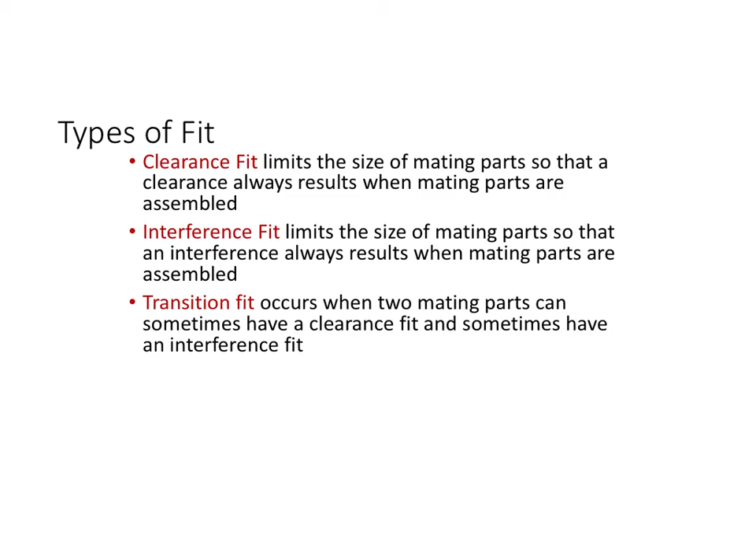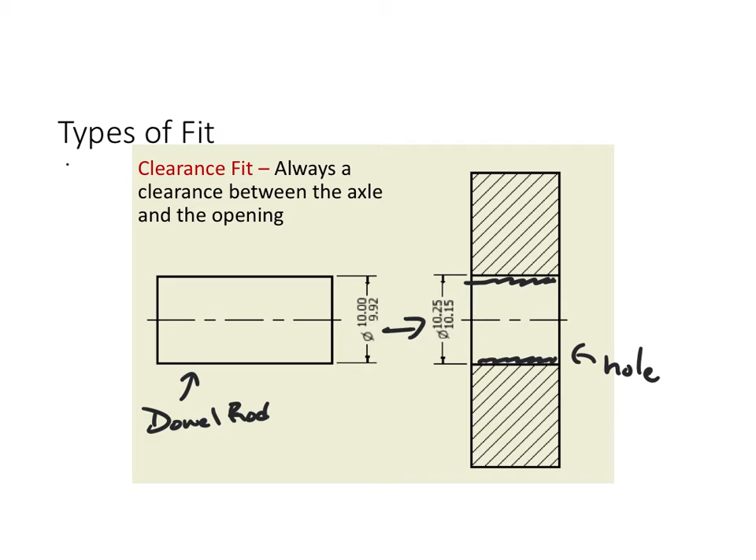So here we go. Let's just pretend that's a dowel rod there. And you got your hole over here. So in this case, we have the dowel rod going into the hole. And when it goes into that hole, no matter what happens, there's always going to be a little bit of wiggle room left in here. There's always going to be a little bit of space when I put that dowel rod in.

And how I can determine this is, let's say we make the dowel rod as big as it'll go. As big as it'll go is 10 inches. Well, the smallest size this hole will go, 10.15, is still not smaller than 10. So even at the smallest the hole is and the largest the peg could be, there's still going to be 0.15 inches of space in between them. So there will always be wiggle room. That is a clearance fit.

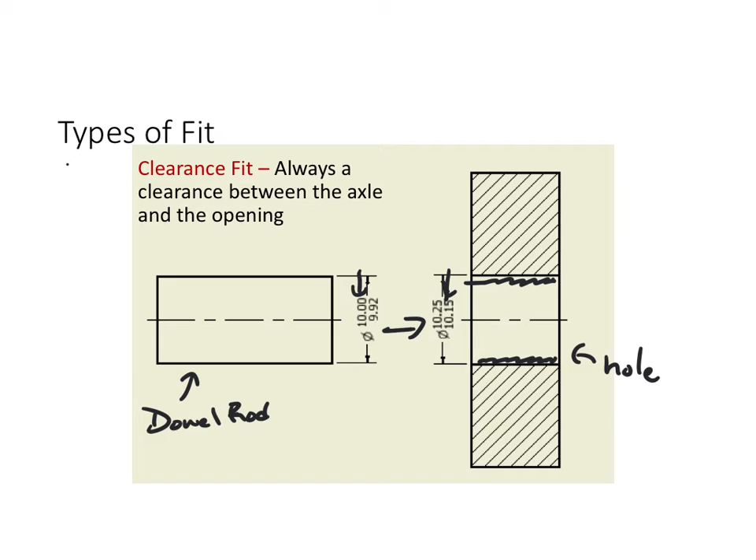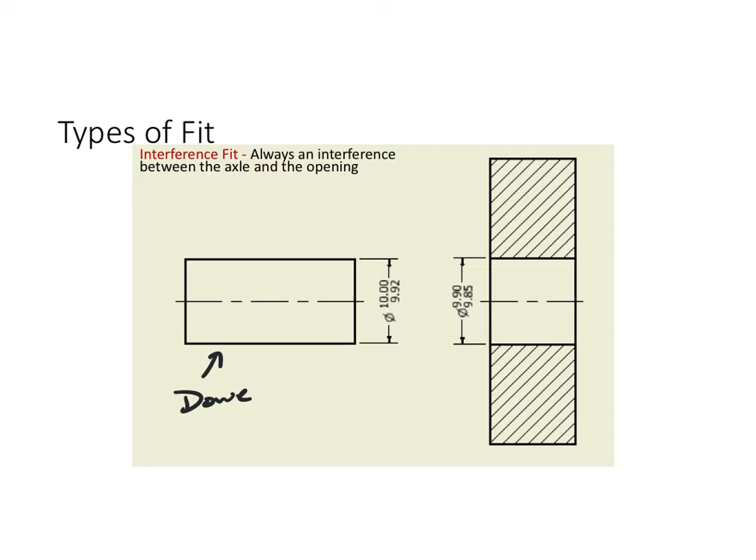Interference fit is obviously the opposite of the clearance fit. When these two go together, they're always going to overlap a little bit. So it's going to take breaking out the mallet and knocking this dowel rod in. So here we have the dowel rod again. That's not how you spell dowel. There we go. And then you have your hole over here. When we put the dowel rod into the hole, it's always going to interfere.

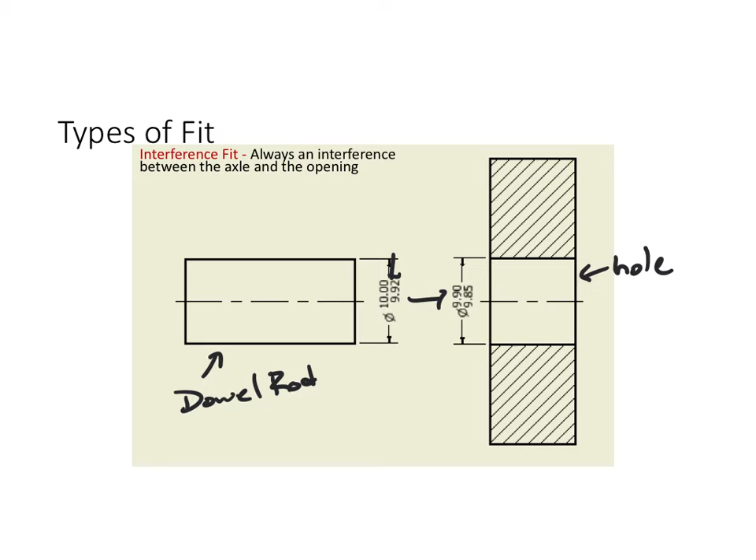Because this time, let's make that dowel rod as small as we can. The smallest size that dowel rod can be is 9.92. Well, let's make that hole as big as we can, so we're trying to make some clearance in between the two. But the biggest I can make that hole is 9.9 inches. So no matter what I do, there's still going to be 0.02 inches of interference in between those two.

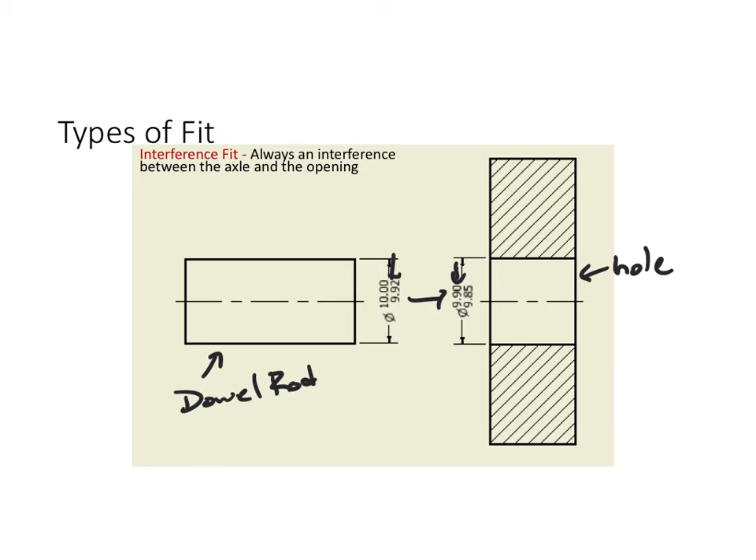So let's look at the last one here, the transition fit. This one can kind of go either way. Let's make the dowel rod as large as it can go, 10.15 inches, and let's make the hole as small as it can go, 10 inches. If the dowel rod is 0.15 bigger than the 10-inch hole, then in this case we would have an interference fit. But let's back that up for a second.

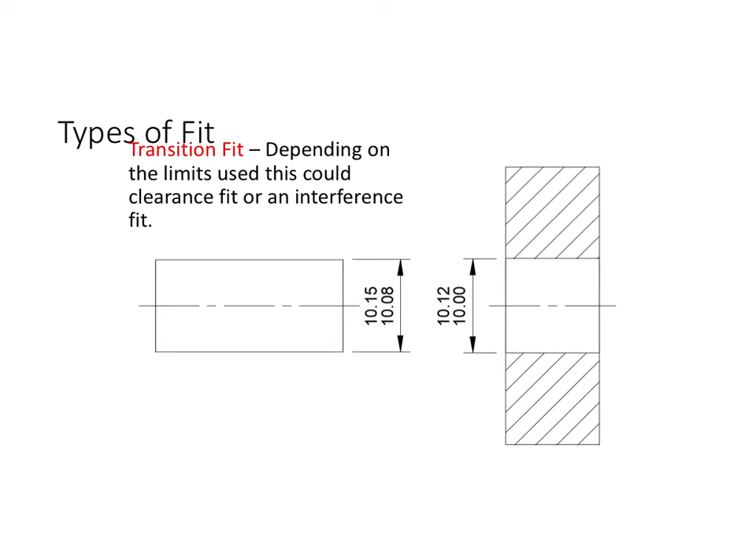Now let's make that dowel rod as small as possible, 10.08, and make the hole as big as possible to see if these overlap still. That's 10.12. Well, that hole is bigger than the smallest dowel rod. So there's a way we can put these two together and still have some wiggle room. So when these fit together, they could have clearance, they could have interference. It depends on where the manufacturer fell within those tolerances. So this is a transition fit. It can go either way.

Now on an internal feature, which is like a hole, the lower limit gives me the maximum material, because if I have a block of wood and I drill a hole into it, the smaller the hole I drill, the more material I leave behind of that block. So if I drill a smaller hole, I leave behind more wood. So the lower limit, the smaller hole, smaller internal feature, gives me the maximum material condition.

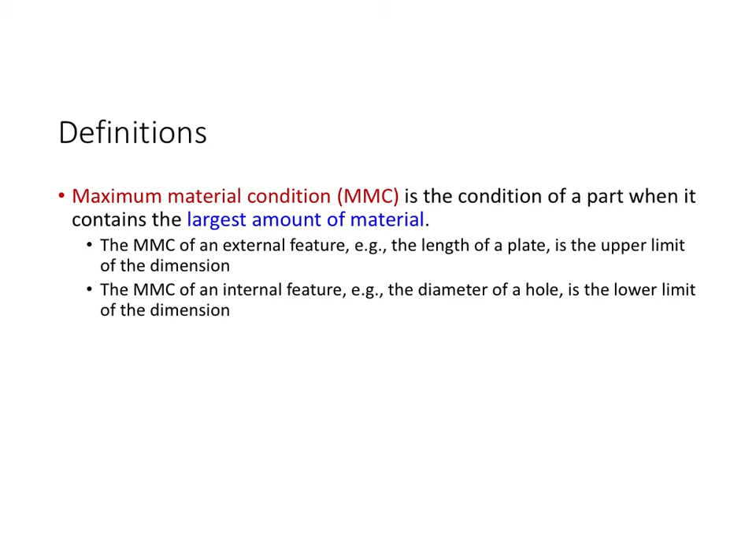And then for the least material condition, the LMC, which we don't really use for what we're about to do here, but we're going to talk about it anyhow, is the smallest amount of material used. So for an external, that's going to be your lower limit. In other words, the dowel rod. We want it to be as small as possible to use as little material as possible.

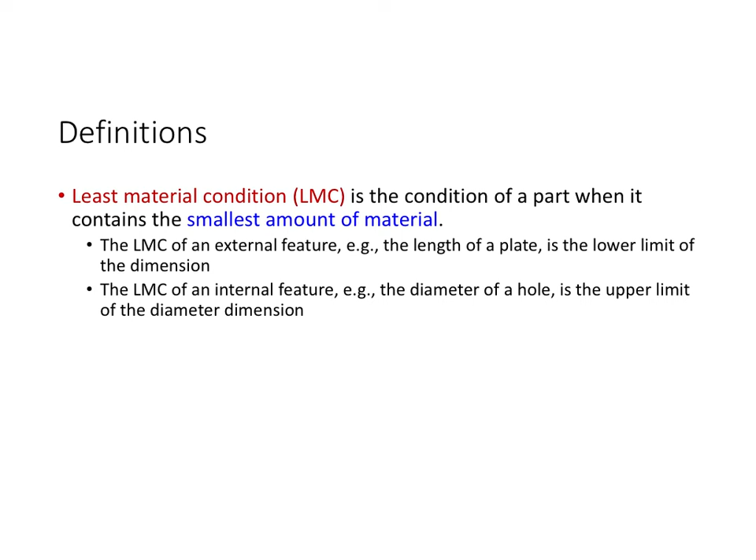Okay? And then the LMC, the least material condition, for an internal feature like a hole, would be the upper limit. Because the bigger the hole, the less material that's left behind. And so we have the least material condition. All right, so allowance is the minimum clearance or maximum interference between the parts. Depends upon what kind of fit we're looking at here. We'll get to that in a second, but here's your general formula for an allowance. It's the maximum material condition of the internal feature minus the maximum material condition for the external feature.

So let's look at an example of this right here. In case you don't remember, this dowel rod and this hole were the clearance fit from before. So if we look at the maximum material condition for the dowel rod, remember maximum material for the dowel rod would be the upper limit. And since the dowel rod is an external feature, that upper limit is going to go where the green is. Now, maximum material condition for the internal feature would be the lower limit, because remember, the smaller the hole, the more material I leave behind. So that's my maximum material condition. That's going to go in for my yellow number.

So if I take that 10.15 and I subtract out 10, I'm left with a positive value of 0.15. So that means that's how much wiggle room I have left between the two objects. I have 0.15 amount of wiggle room when we're using the most material possible. All right, that's our allowance.

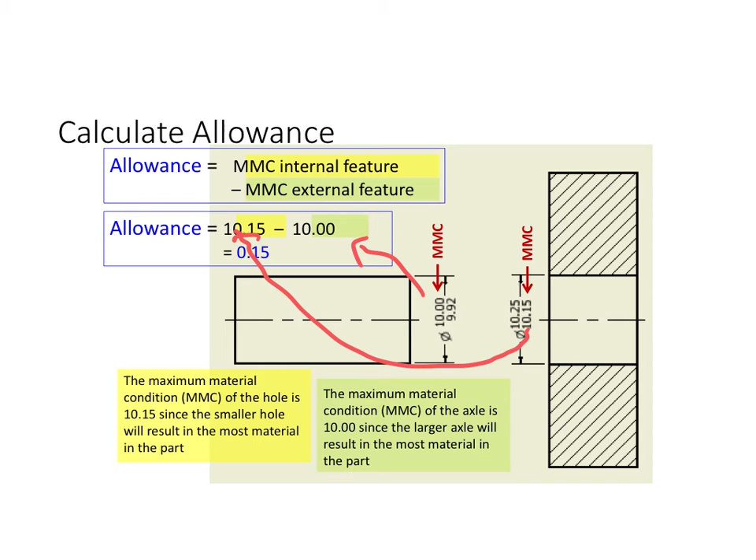All right, now looking at this one. This one is our interference fit, and we're still going to use the same numbers here. So the maximum material condition for the internal feature, the hole, would be the lower limit, because remember, smaller hole leaves behind more material. And for the dowel rod, our maximum material condition for the external feature would be the upper limit, because the larger the diameter of the dowel rod, the more wood we're going to use to create that dowel rod.

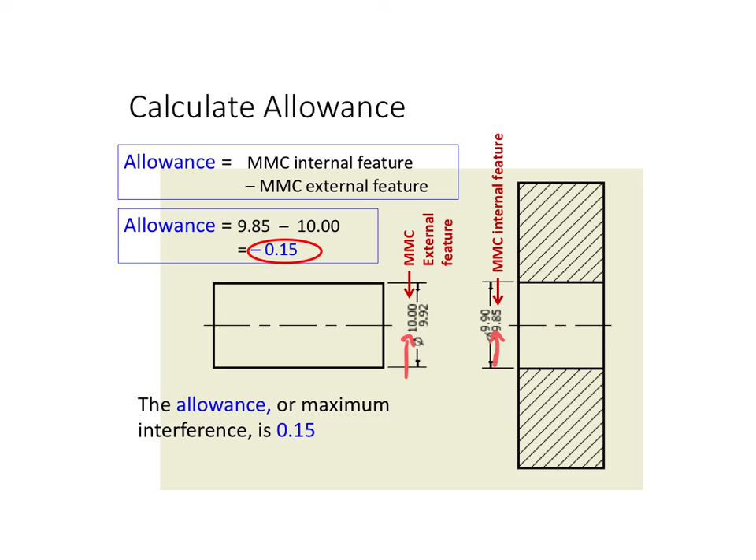So if we take the 9.85, that's our internal feature, and we subtract the 10, our external feature, we end up with negative 0.15. And the reason we end up with the negative is because this is interference. They overlap each other by 0.15. So it's a negative because it's overlapping, hence interference. So another way of saying this is the maximum interference is 0.15.

All right, kind of quick note here to summarize about tolerances. When you're dimensioning tolerances, and I think I've mentioned this to the students in my class before, the more significant figures, basically the more decimal places you add onto the end of your tolerance, the tighter the tolerance. In other words, you're not going to give the manufacturer much wiggle room. It's really hard to get it that precise. And to get it that precise, it costs a lot of money, because you need very specific tools. You end up throwing out the parts that aren't to the tolerances, and it costs more to manufacture. So you don't want to overly give tight tolerances that are not necessary.

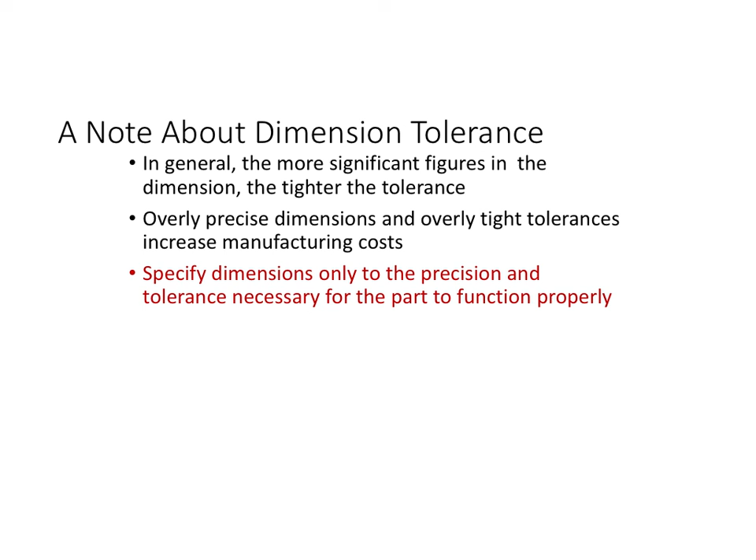Obviously, if you're building, say, a jet engine, giving those tighter tolerances, those more significant figures, is important. But say if you're building, I don't know, a children's toy, it doesn't always need to be as precise. There can be a little bit more wiggle room there. We wouldn't use the same tolerances to build a children's toy as to build a jet engine. So be very careful with that.

And the last thing is if it's out of tolerance. Basically it's not within those specified limits that we've been given. If it's out of tolerance, it's junk. And usually that's why you see the quality control people. You ever get one of those stickers on something that says like checked by number 12 or something like that? Those are the quality control people who are checking those parts to make sure they fall in tolerance.

Now, do you think they checked every part, or do you think they checked some of the parts? They probably took a sample, and they checked to see if those samples fall within the tolerances. And if they do, they keep on manufacturing. If they don't, then they probably got to fix something.